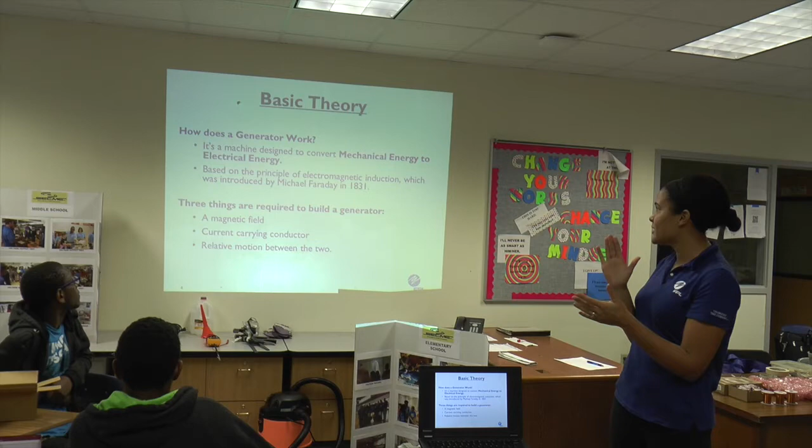Okay, so basic theory of electric generators. So how does a generator work? It's a machine designed to convert mechanical energy into electrical energy. And it's based on a principle called electromagnetic induction from a guy named Michael Faraday.

Anybody ever heard of him? All right, good job. What do you know about him? Pop quiz. Well, he was always an astrologist. Was he? No? What?

All right, I won't put y'all on the spot. Oh, I can do it.

All right, so we'll go into it, but basically, he discovered electromagnetic induction, and he found out that all you need to create electricity is three simple things. And if you get these three simple concepts, you can build your own generator at home.

A magnetic field, and who can tell me what will create a magnetic field? Magnets, you got that right. A current carrying conductor, right? Wire, right? And basically motion between the two.

Because when you think about it, wire is based of, what's the elementary building block of anything? Copper. Well, it's made up of atoms. There you go, atoms. So there's billions and billions of atoms, and an atom is made up of what? Exactly, protons, neutrons, and electrons.

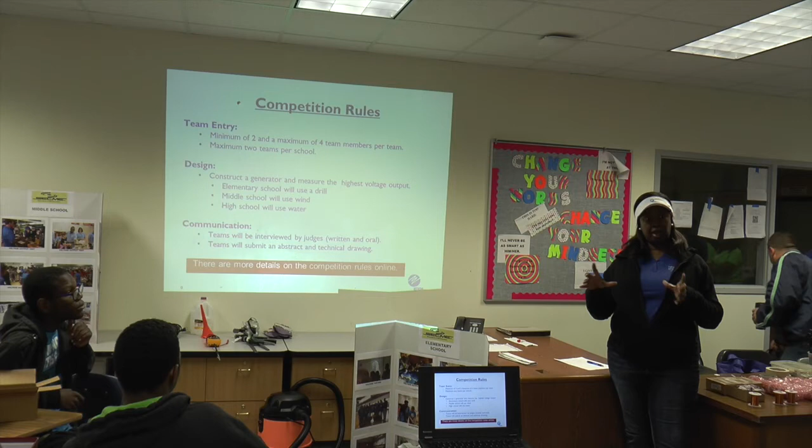Good? When it comes to the design, construct the generator and measure the highest voltage output. So basically what we're going to do is for the elementary school, we'll have them use a drill. We have... when we start doing the actual hands-on, we'll show you guys the drill. The middle school will use a vacuum, like wind, to see if we can generate some voltage. And in the high school, we're going to use water.

Communications: the team will be interviewed by judges, so you will have both written actual questions that you will answer on the day of the competition, and also we'll bring you to a room where you'll be interviewed by a couple of judges who will ask you to make sure that you truly understand the rules overall. The teams will submit an abstract and a technical drawing. This only applies to the middle school and high school, not elementary schools.

Does elementary have to turn in anything other than the actual generator? Just the generator, no pictures, nothing else? No pictures.

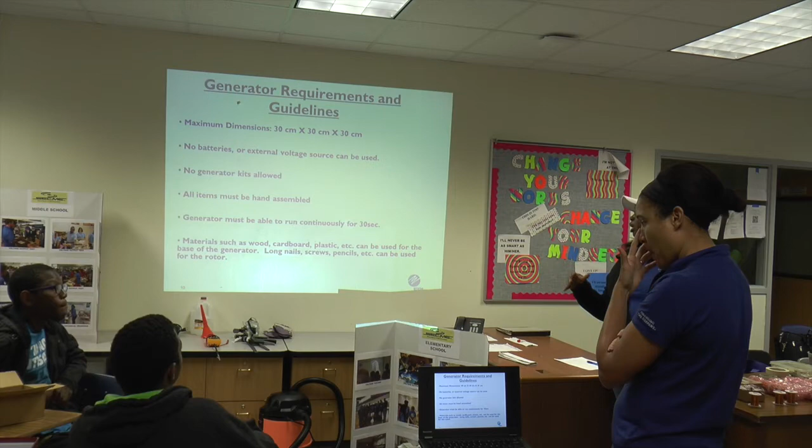So for the guidelines, one of the things we see is often when they build it, we're asking for maximum dimensions of 30 centimeters by 30 centimeters by 30 centimeters. This will also be online for you guys to download. No batteries or external voltage source will be used. One of the things we've seen in a couple of years is that we'll see a generator, but then it will have some spoons or something aesthetic that will make it pass the actual maximum dimensions. We want to clearly specify that for this competition, we want to stay within the limits.

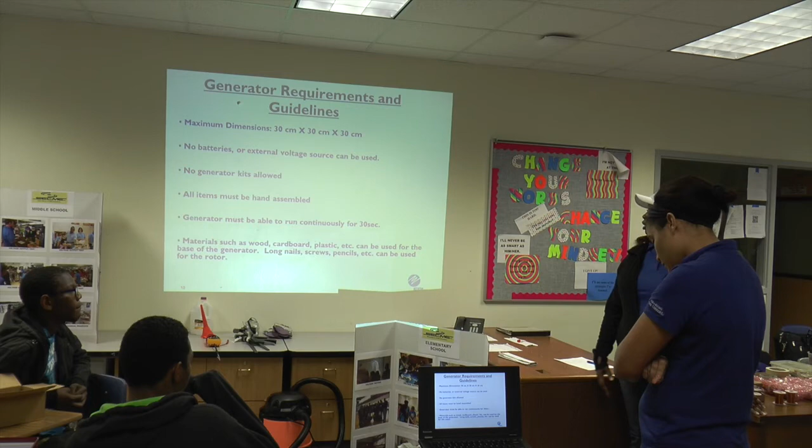No generator kits are allowed. All items will be hand assembled. The generator must be able to run continuously for 30 seconds. So when it comes to materials that are acceptable: wood, cardboard, plastic, etc. can be used for the base of the generator. Long nails, screws, pencils, etc. can be used for the rotor. You guys will see this when we start practicing today, where you can use a pencil or a long bolt as your rotor.

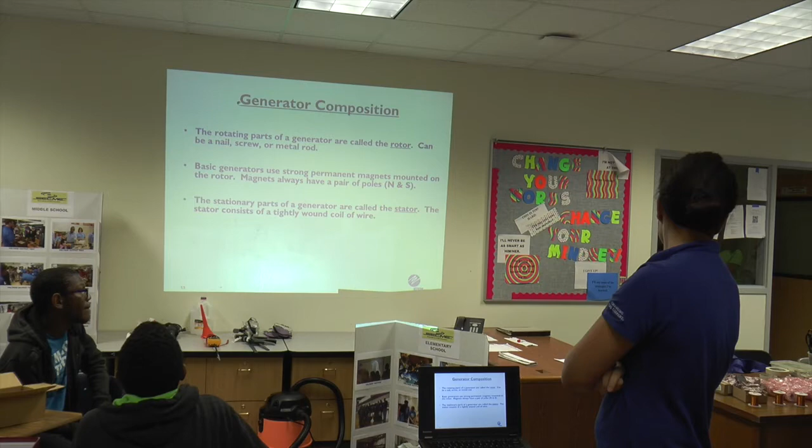In this section, we'll talk about the more practical aspects of building a generator. A lot of what I'm talking about now, we're actually going to see in practice over the next hour as you all build a little generator in this workshop. First, the rotating parts of the generator are called the rotor. Usually we use a nail, a screw, or a metal rod; anything long and cylindrical can work as a rotor. We always use strong permanent magnets and mount them on the rotor. The stationary parts of the generator are called the stator. And remember, we do have a little test along with the building of the generator, so as a hint, remembering what the rotor and the stator are is pretty important.

Stay on this side so everybody can see it. Over here I have a model, a diagram of a generator, very similar to the one we're going to demonstrate today. The stationary parts of the generator can be made out of wood, cardboard, metal, plastic, whatever. Over here we have wire. Can we turn off the lights at the front so you can see this a little better?

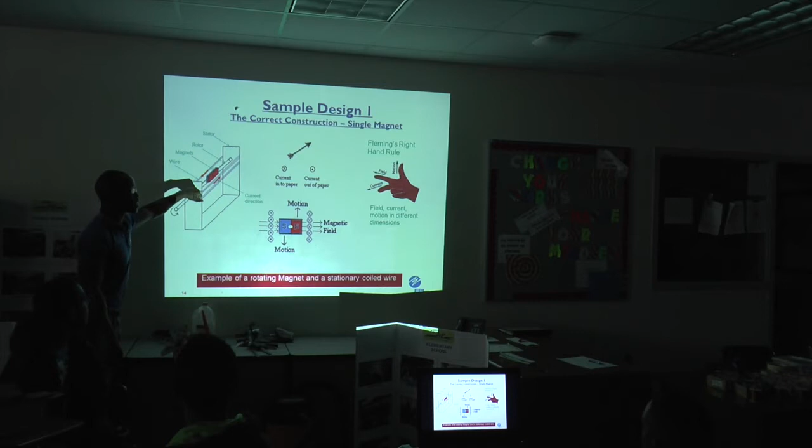Okay, so we have wire running around the edge of the stator. Good. You can see we have the rotor, which is like a long screw going through the stator, and we have magnets mounted on the rotor.

Now to explain how this works, I'm going to talk about Fleming's right-hand rule. But before I do that, in this diagram, this is the same thing as this. This is just showing a cross-section of it. So if you cut away the front of the generator, you look straight down it. You see the magnet, North Pole and South Pole. You have the rotor in the middle, and you have the coils of wire on both sides.

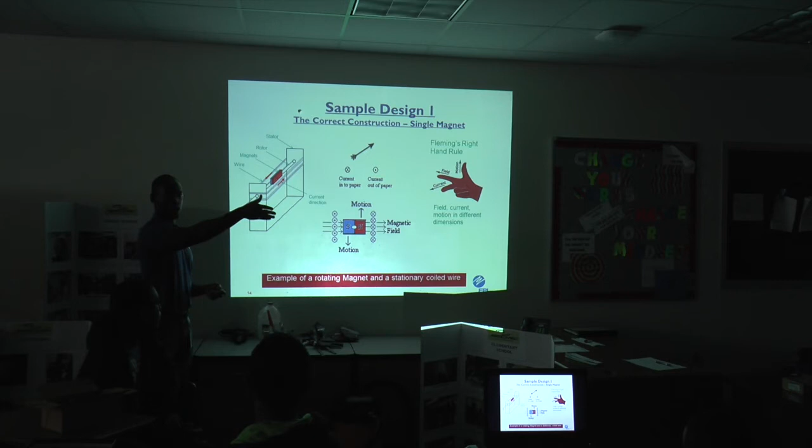In electrical engineering, whenever we want to draw a wire going straight into or out of the paper, these are the symbols that we use. So if the current is going into the paper, we use a circle with a little cross inside it. Think of it like an arrow. If an arrow is going away from you, the back of the arrow looks like a cross, right?

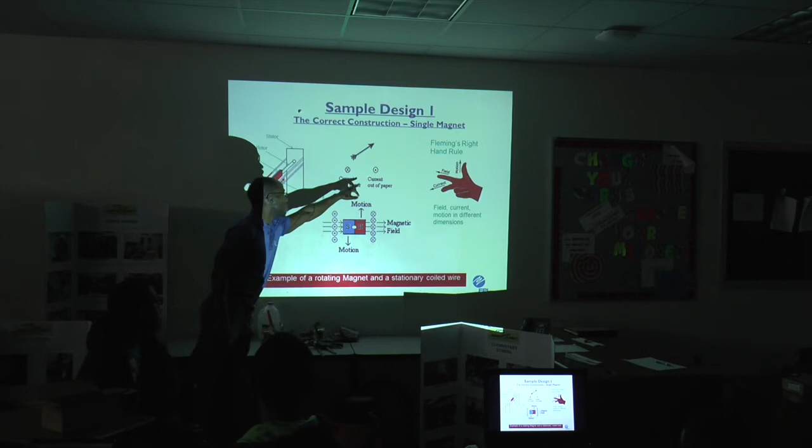So that's why we use this symbol for a wire going straight into the paper with the current going into the paper. And if the current is coming out of the paper towards us, we use a circle with a little dot in it. It's kind of like an arrow coming towards you. The front of the arrow is just like a little point. So now for Fleming's right-hand rule, we can use this to tell us the direction that the current is going to be in once it's generated.

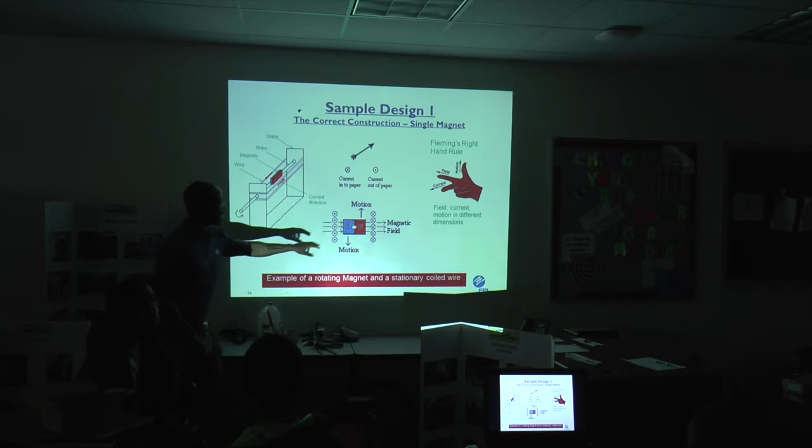The thumb represents motion, the direction that the magnetic field is moving. The first finger represents a magnetic field, and I'm going to be making strange symbols at you all here, nobody take offense. And the third finger represents current. So let's do it for the wire on the right of the magnet. Let's look at what direction the current is going to be.

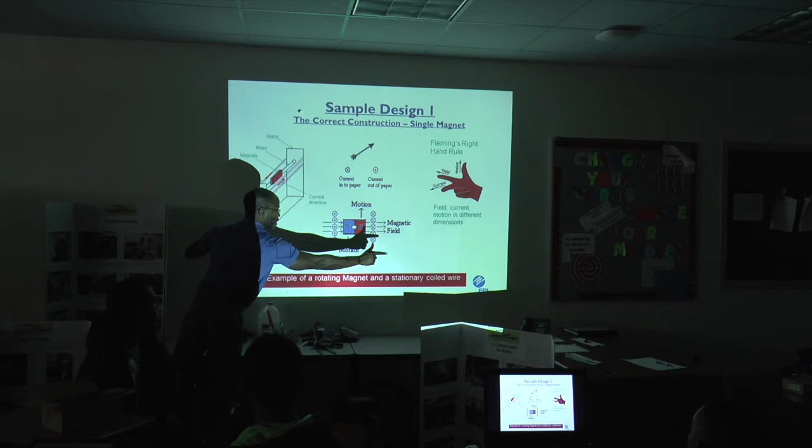So if the rotor is spinning anti-clockwise, that means the North Pole is going up, South Pole is going down. So my motion is up. The magnetic field always goes out of the North Pole. So my field is to the right. And you can do it along with me, because we've had lots of groups make mistakes with this.

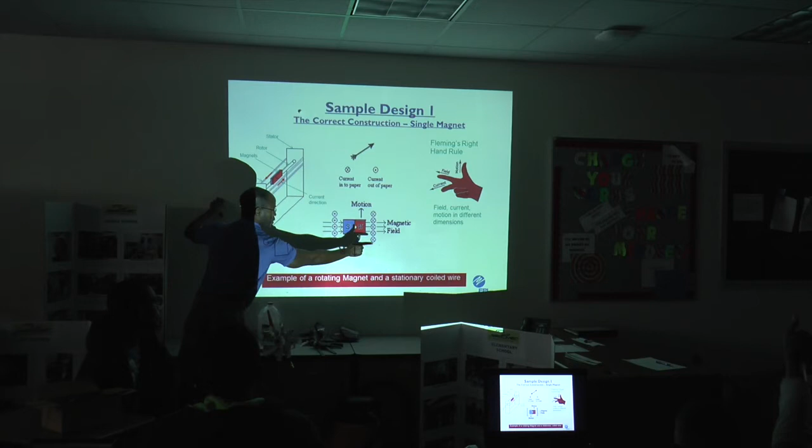And I'm going to explain in the later slides how you can mess up your generator if you don't understand this properly. But motion is up, magnetic field to the right. That means that my current is going to be going into the paper. So if we do it in the three-dimensional drawing, if my North Pole is going up, magnetic field is going to the right, my current will be going into the paper that way, with that red arrow there.

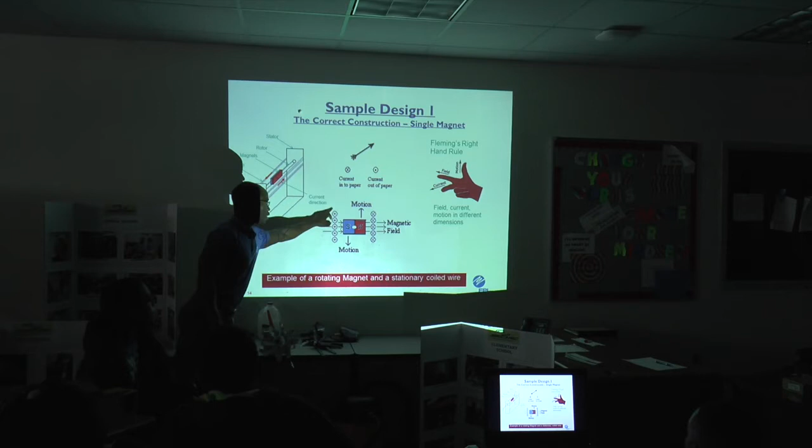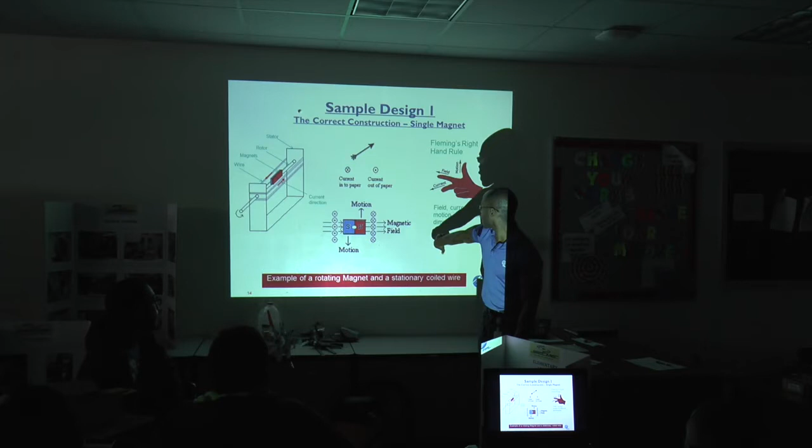On the other side, if I look at the coils of wire on the left side, now my motion is going down, and it gets harder to do it, but my motion is going down. My magnetic field always goes into the South Pole. And that means that the current is coming out of the paper.

Does everybody see that? And the key thing here is that on one side of the generator you have the current going that way, on the other side the current is coming this way. So the current goes around and around in a circle, it gets stronger and stronger. If you can somehow do this wrong, and I'll show you in later slides how you can do it wrong, the current will cancel itself out. So it's very important that you have the current going into the paper on one side, out of the paper on the other side, and that way it just adds up.

Sorry, we had a question back there? Oh, no, I was just verifying. So your field and your motion could be like an X and Y, and then your middle finger would be the Z going in the other direction. That's a nice way to say it, yeah. One of the points of Fleming's right-hand rule that I think you're pointing out is that the motion, the magnetic field, and the current are in 3 different dimensions.

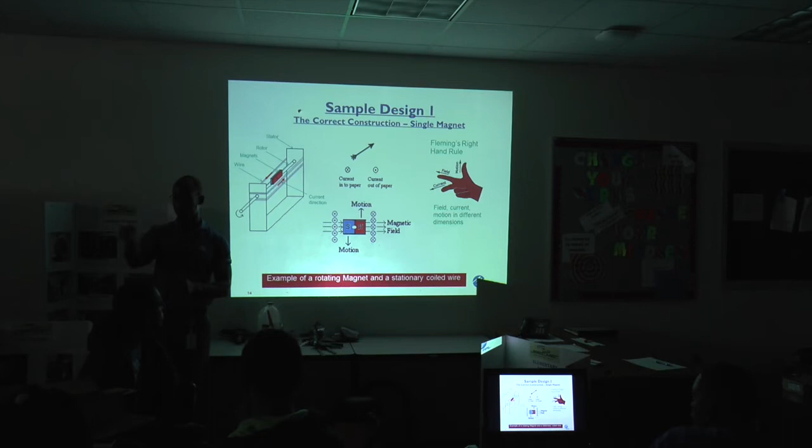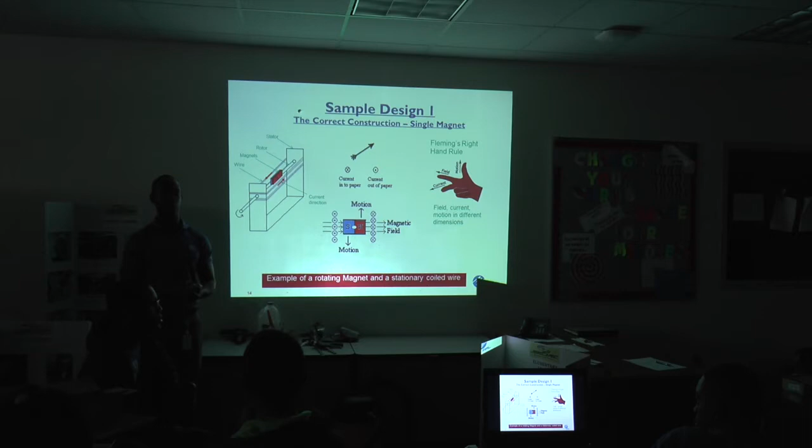Yeah. And as we start to wind up our generator, that's one common mistake that we always have. You'll notice that if the magnet is spinning this way, you have to wrap the wire this way. You know, if the magnet is spinning this way and you try to wrap the wire in the same dimension, it'll violate Fleming's right-hand rule and we won't get any current generated.

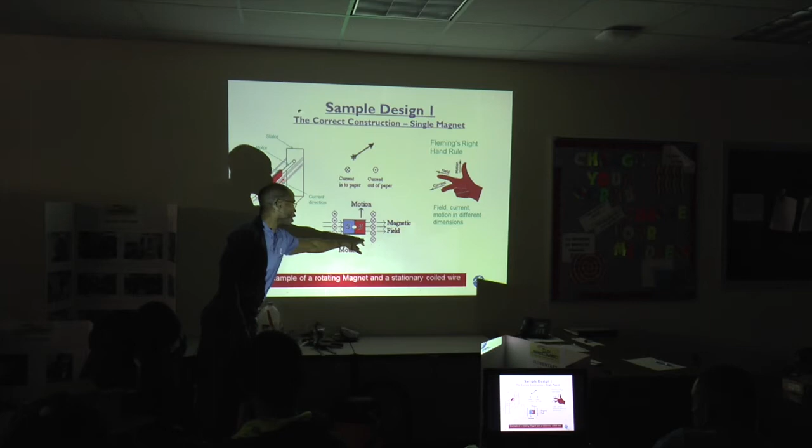When Melanie spoke about the theory, she mentioned that you need a changing magnetic field. Can you go back one slide? In this case, when the poles are pointing outwards, initially this wire is seeing a north pole. Then as the magnet spins, it sees a south pole, then a north pole, then a south pole. So it sees a changing magnetic field.

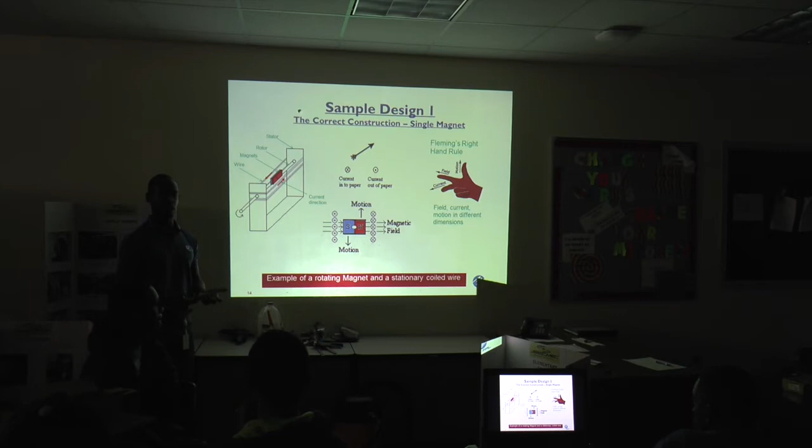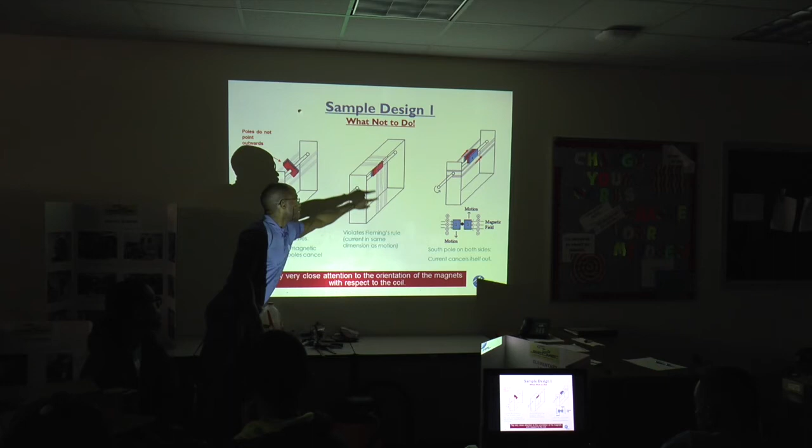And as I mentioned before, in this case, they wrap the wire this way. So the magnet is spinning this way. The wire is also spinning this way in the same dimension. That violates Fleming's right-hand rule. You're not going to get any voltage generated there. And in the last example, that one also violates Fleming's right-hand rule.

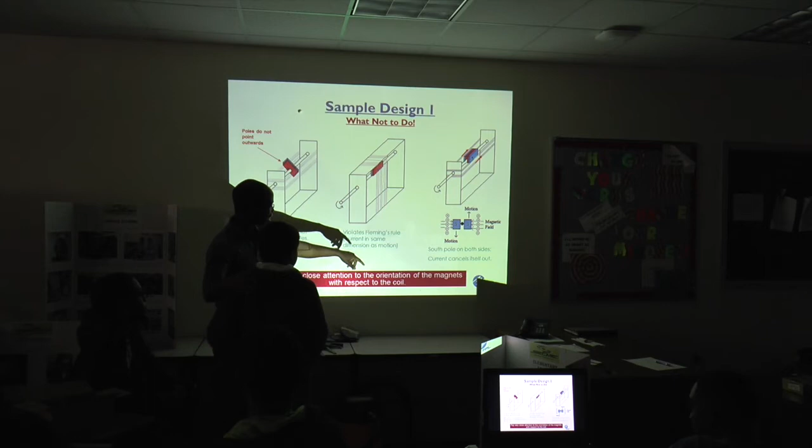We're going to walk through Fleming's right-hand rule there, and we're going to show why the currents cancel each other out. But instead of me doing it, can I get a volunteer? Does anybody think they understand Fleming's right-hand rule? Okay, I have a volunteer there. Want to come on up? I'm going to need you to stand up right in front of it, like right here. A little bit more towards me. Yes, that way your shadow is in there.

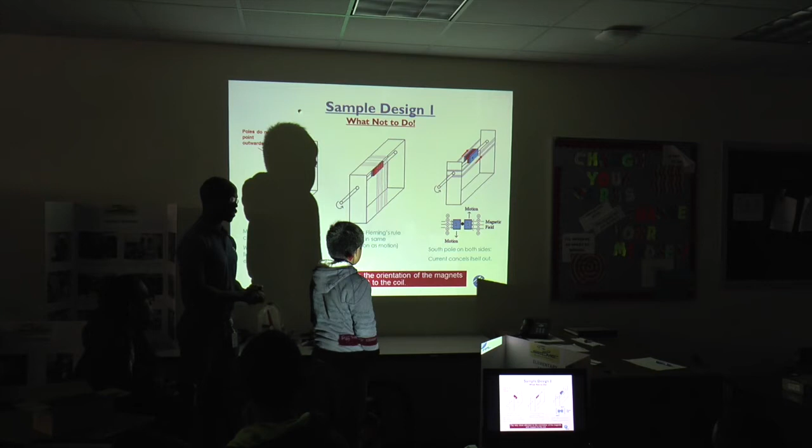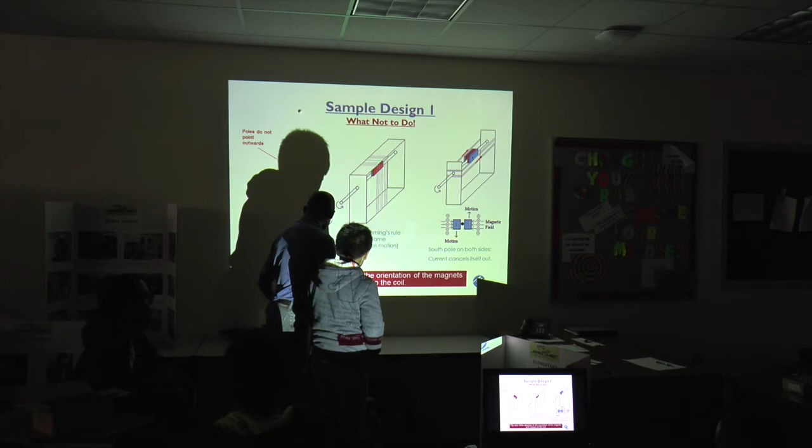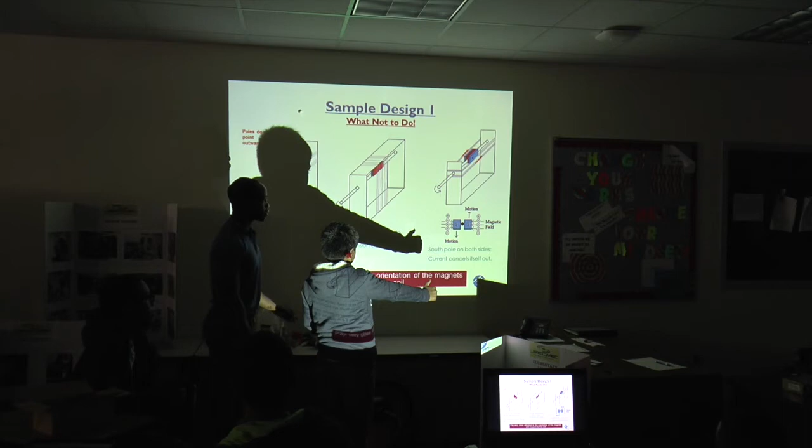Okay, so let's start with the coil of wire on the right of the magnets. Can you show me using your thumb which direction the motion is going? So if you stick your hand out, which direction is the motion? I need something to point with. So over here, the motion is going up, right? Yeah, let's stick your hand out. No, keep it up. Which direction is the magnetic field? Yeah. You know what? Let me get you to.

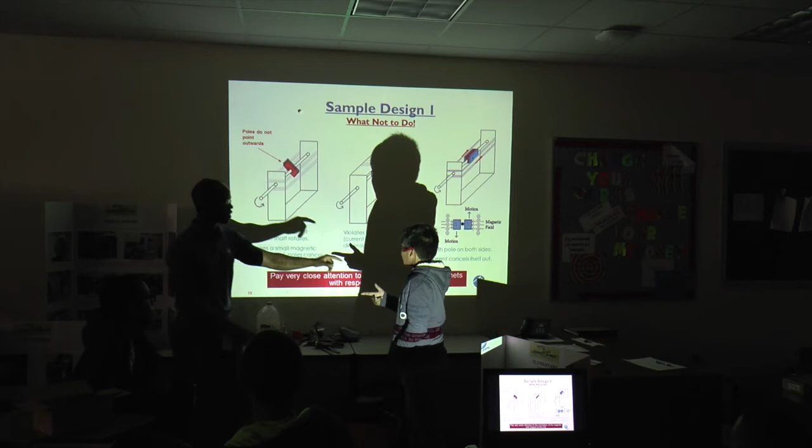Alright, so everybody sees that motion is up, magnetic field to the left. So which direction is my current going to be going? Show me with your finger. No, you had it just then. Okay, there you go. So on the right side of the magnets, the current is coming out of the paper. No, wait, hold on a second. All the way. Can't bend it. Yeah, I'm sorry, so the current should be going into the paper. Yeah, no, I was just testing you out.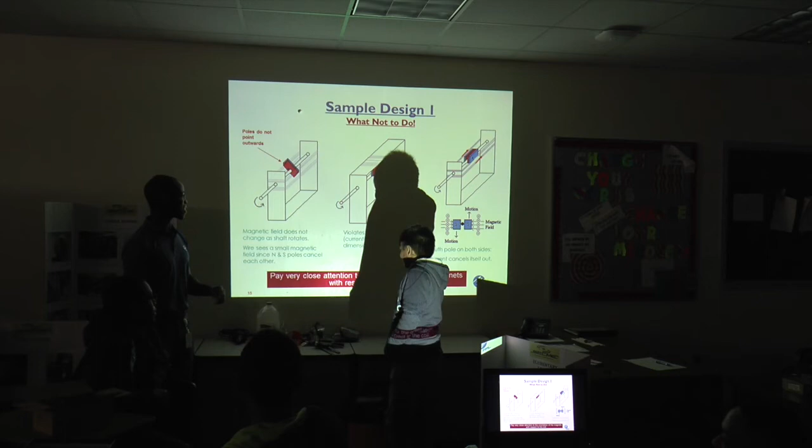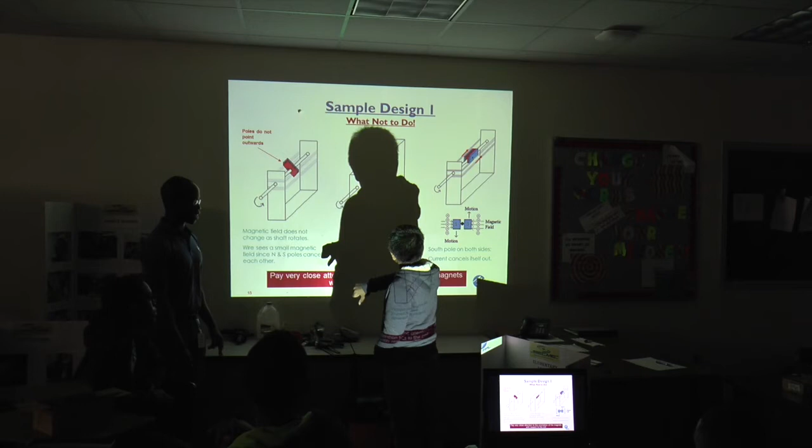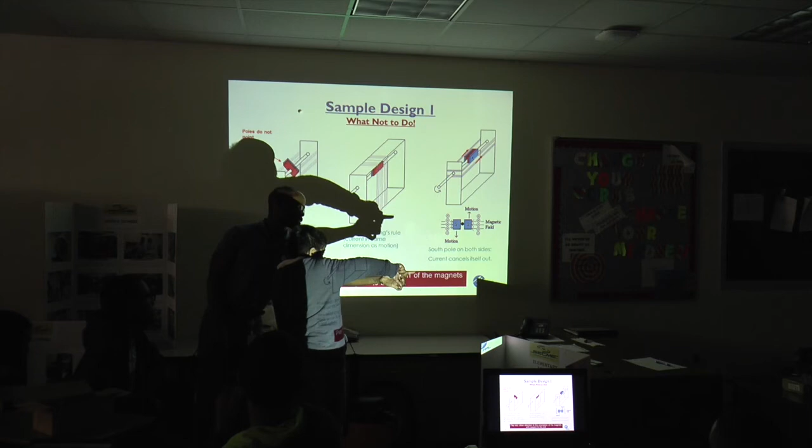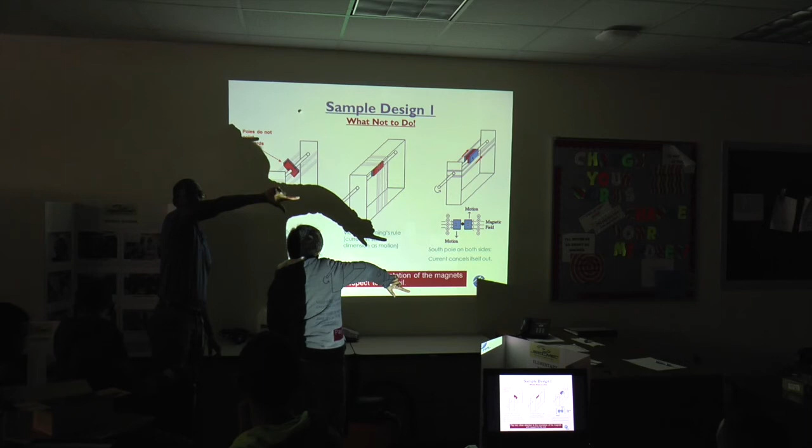Let's do the same thing on the left side of the magnets. So my motion is going down. My magnetic field, is it going to the left or to the right? Yes, it's going to the right. So, okay. So my current, is it going into or out of the paper? Show me with your finger. So tuck these in. I have it down to the right. And this finger is going out. Does everybody see that? Motion down, magnetic field to the right, and current coming out of the paper. Everybody see that? Thank you very much.

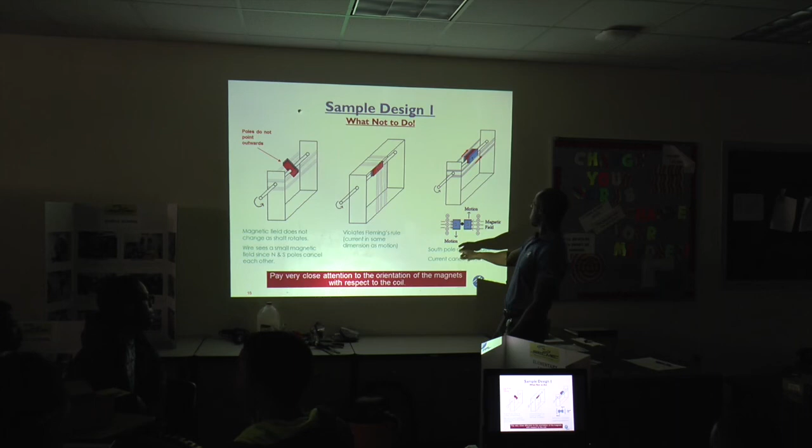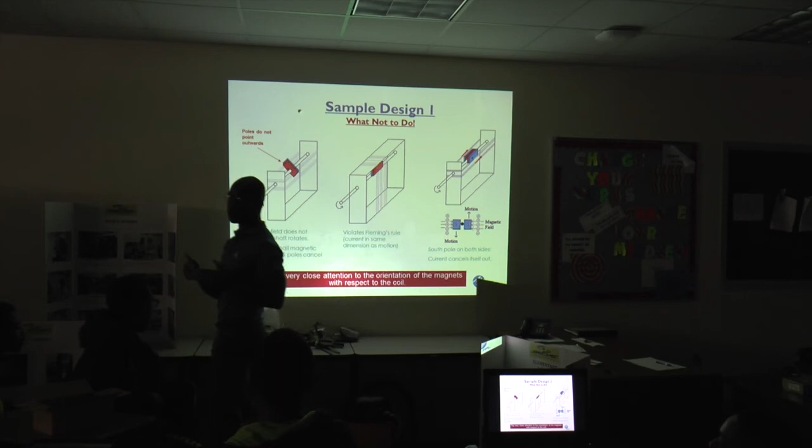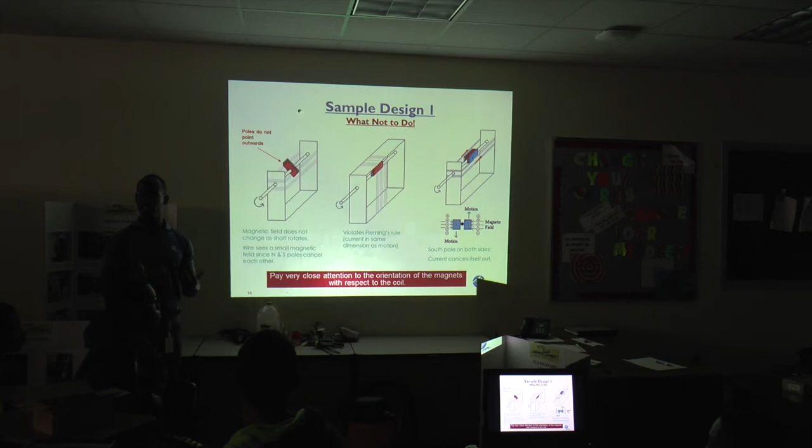The point of doing all of that is just to show that if you construct your generator wrong, you have the current going in the same direction on both sides. That means that the current is going to cancel itself out, and the generator will produce no voltage, no current. We have had cases where this has happened. It's also only seeing the south pole, right? Exactly, yeah. And that's one of the key takeaways here. One side of the generator has to see a south pole, another side has to see a north pole. So this is all what not to do.

Another key thing to remember, Melanie pointed out that you have two types of bar magnets out there. You can have the kind magnetized to the thickness and the kind magnetized to the length. We always want our poles to be pointing outwards. And for the most part, I'm showing you this kind of design. I don't know what kind of magnets you have. I haven't had a chance to inspect them. If you have that kind, then your generator is going to look a little bit different.

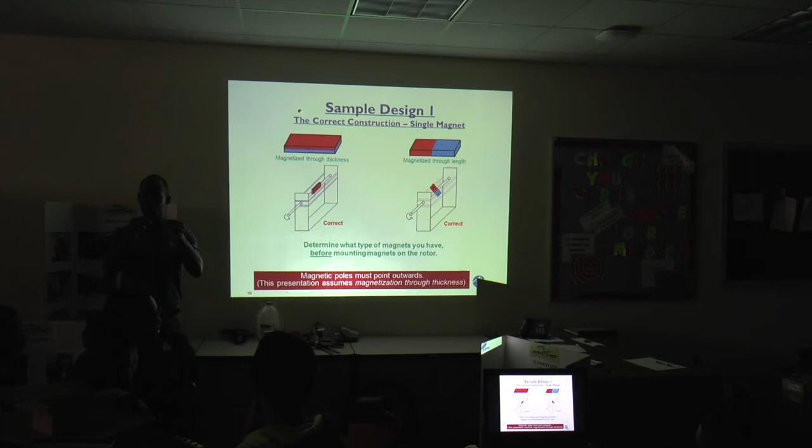So the first thing we're going to do when we get these magnets, we're going to hold them together lengthways, we're going to flip them over the other way. We're going to try and figure out what kind of magnet we have. And then as we start constructing this thing, we're going to make sure the poles are pointing outwards. Does the rotor have to turn anti-clockwise? No, it can turn either way, yeah.

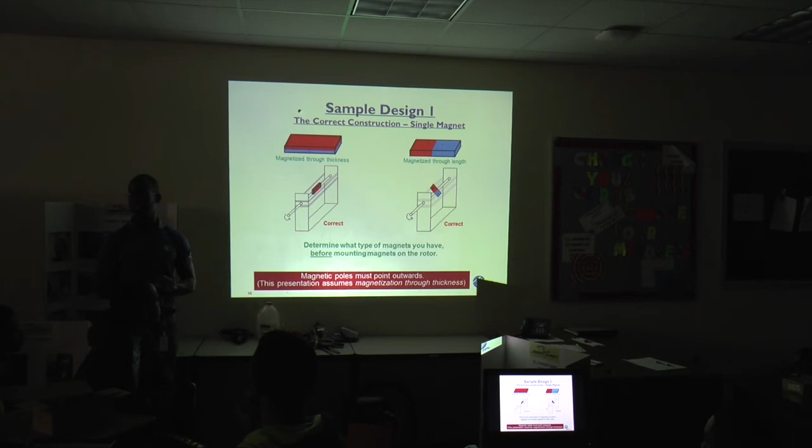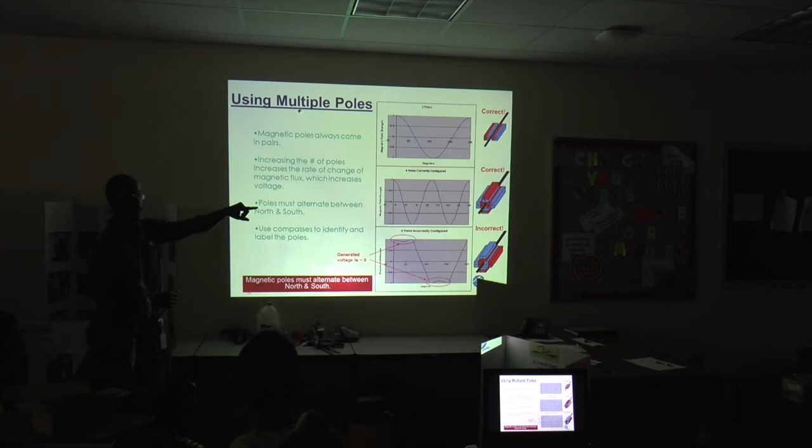In the second one, I'm showing a 4-pole generator. So we can see that we have 2 north poles sticking out, one at the top, one at the bottom, and 2 south poles on either end. We call this a 4-pole generator because it has 4 poles that are exposed. And the whole point of a 4-pole generator, you have a question? Go ahead, Alan. Go ahead and finish your thought, Alan.

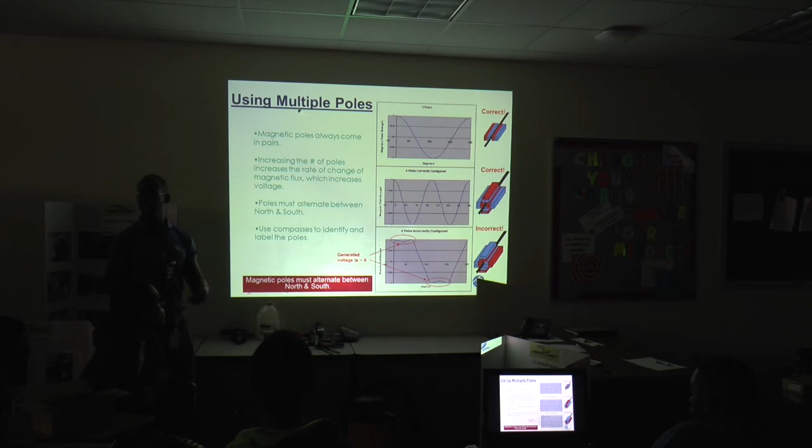Okay. Now the advantage of a 4-pole generator is that when Melanie gave us our theory, she gave us Faraday's equation. Part of what gives you a higher voltage is having a higher rate of change of magnetic field. With the 2-pole generator, as you spin it 360 degrees, one side of the generator will see a north pole, then a south pole, then a north pole again. With a 4-pole generator, it goes north, south, north, south, north. The magnetic field changes quicker. It's oscillating between north and south quicker. You have a higher rate of change of magnetic field, you get a higher voltage.

There was the idea of that, but with Palm Beach County and Broward County coming up with what we thought would be fair, it's 4 magnets that we give you, and they have to stay intact. That's just to make the validity of it, and you know, the even playing field, not changing too many variables. But you can build a 4-pole generator with 4 magnets. Yes.

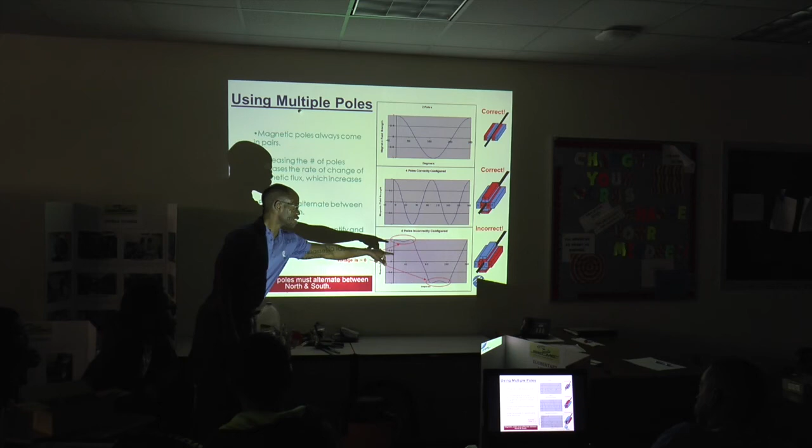Yeah. But okay, so what I was saying now is that you want to make sure that you're going north pole, south pole, north pole, south pole. In this case, you can see they have north poles next to each other and south poles next to each other. So as the generator is spinning, you may go north, north, south, south, and then back to north. If the magnetic field is changing from a north pole to a north pole, the magnetic field really isn't changing. If the magnetic field is not changing, you're not going to have any voltage. So in this case, that's a poor design, and you have a very low voltage generator.

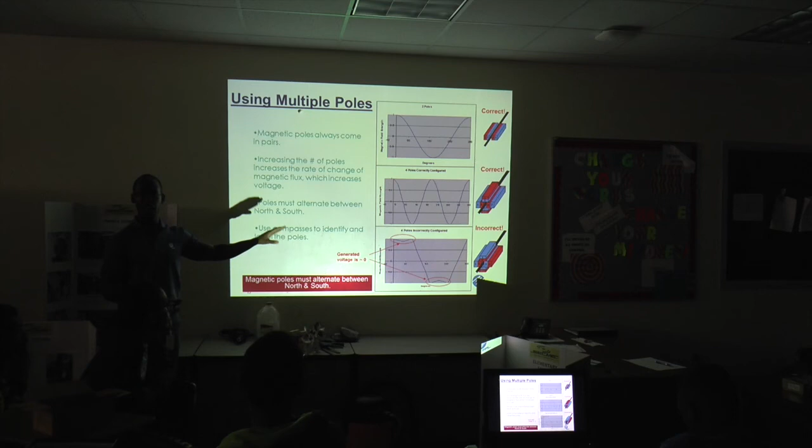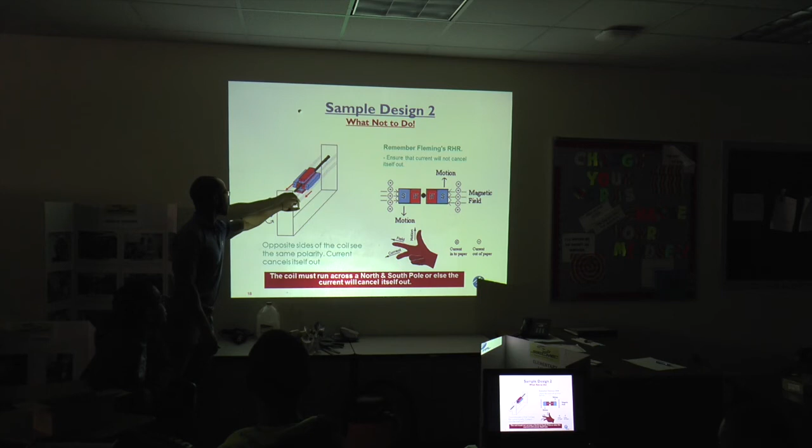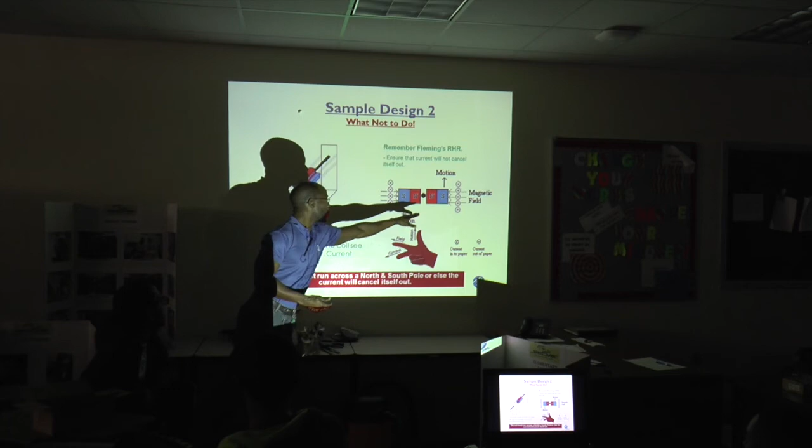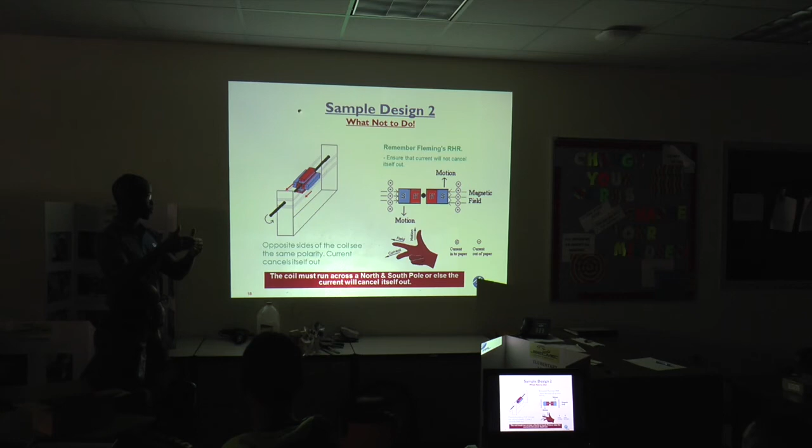Okay, this is another example of what not to do. And the main takeaway here is, and I showed this with eight magnets, but no, actually that's 1, 2, 3, 4 magnets. That's 4 magnets. Okay, the main takeaway here is that this violated Fleming's right-hand rule again. They wrapped the wire the same way you wrap it for a 2-pole generator, and that's a problem because both sides of the coil end up seeing the same polarity. Both sides in this case are seeing a south pole. You end up with the current in the same direction, and it cancels out. So this is an example of what not to do.

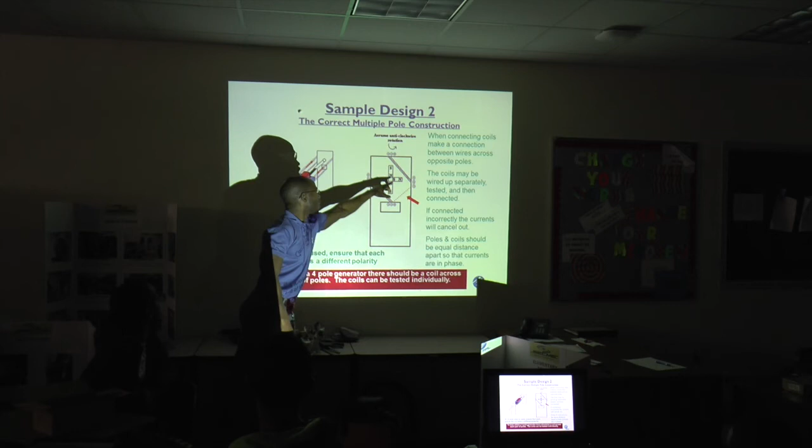If you go with a 4-pole generator, then now you need 2 separate coils, and you have to make sure that each coil goes between a north pole and a south pole, a north pole and a south pole. And then later on, when you wire up the 2 separate coils, you can connect them together. You have to be very careful how you connect them together. If you connect them together properly, they will add, and you'll get double the voltage. If you connect them together the wrong way, they subtract and you get 0 voltage. That's why it's better to wire it up completely separately, 2 separate things, and then you connect them afterwards.

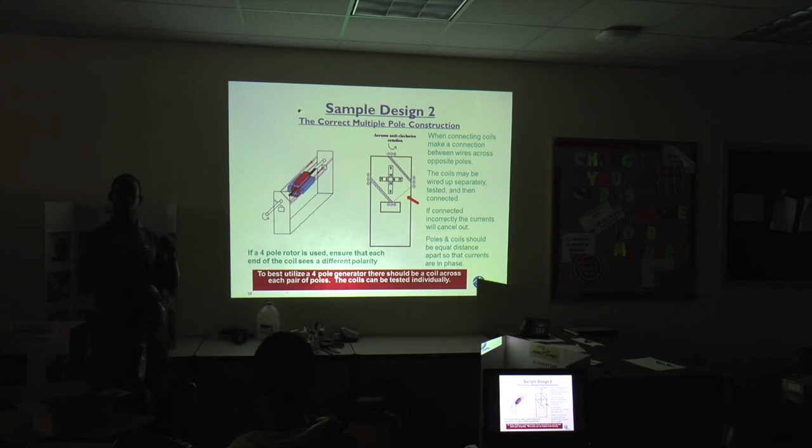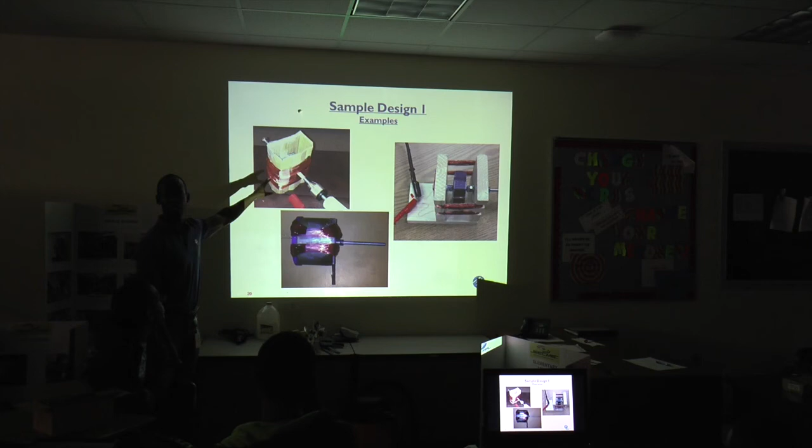Next slide. These are just some examples of generators that we built. That one we built out of wood. This one we built out of cardboard. This is very similar to the one we're about to build in this workshop right now. And this one was out of an old peanut jar.

I should also mention that once we're finished speaking, you can come up, you can look at some of the generators that were built by students in past years and past competitions. I think they did a great job. A lot of these generators that they built are better than the ones that we built. Next slide.

Okay, now this is the actual exercise that we'll be doing here today, but before we do that, can we turn the lights back on? Before we do that, I'm going to have Gibbons come up here and give you a little demonstration of a wind generator and also to show you the equipment that we use for the elementary and middle school. Good morning, everyone. I'm Gibbons.

So when we're going to be testing your generators and when you're testing them at home, the most important thing, first of all, is safety. So you want to have safety goggles, work gloves, because we have had cases where we were testing a generator and parts started flying all over the place and attacking people, so you don't want that to happen, but if it does, you have to be prepared and have safety glasses so you don't get anything in your eye. But make sure you build them strong and sturdy so that doesn't happen. So safety, you will clamp the generator down to the table so that they don't move around.

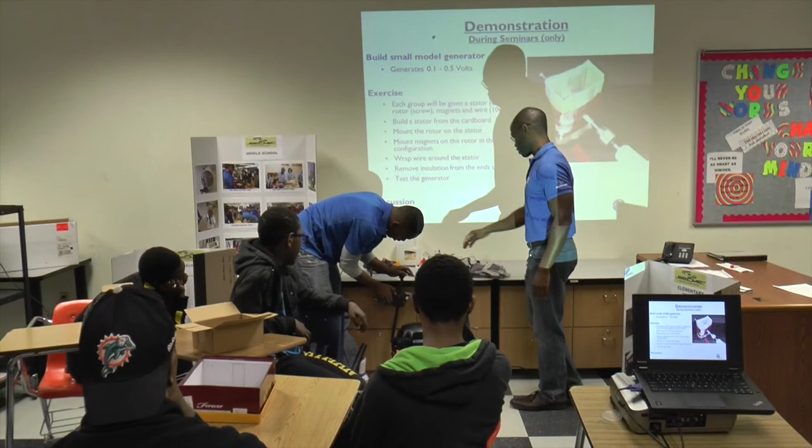And for middle school is the wind competition. So you need to attach something to your rotor that's basically going to grab the wind and be able to spin your rotor. So I can give you a demonstration of how that works. Now, you're not gonna be able to see it from back there, but we actually do have a little LED back here that will be blinking on and off as the generator generates voltage.

Alright, so we use this vacuum cleaner, and you guys probably know vacuum sucks, but if we just attach our hose to the backside, we get the air coming out, and that's gonna blow our rotor. And you guys can't see it, but the light is blinking, showing that we are getting electricity. Alright, so during the workshop, you can actually come up, you can test it for yourself, you can see the light blinking on and off.

During the actual competition, you'll be holding the vacuum cleaner yourself. You'll be pouring the water yourself, which gets a little messy. So, high school, you get 1 gallon of water, you get a funnel, and you have to build your rotor to have something that's going to catch the water. And basically, you just pour until you run out of water and get the voltage out of that.

So that's pretty much it as far as our demonstration. Your generators are going to be pretty much the same as this, have the same concept, but we want them to look a little different, use different materials. Creativity and originality are part of your score, so